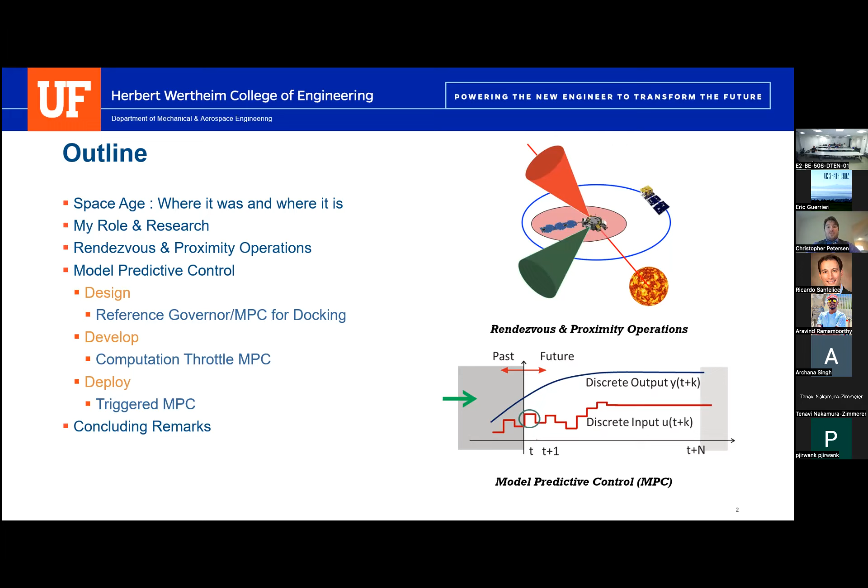So to set the stage a little bit, the first space age was in the mid 20th century. This first space age was really driven by governmental interests, primarily the US and the USSR. In 1969, we roughly had around 1,500 objects in space, 7 nations operating out in that regime, 2 nations to the moon, but a lot of the focus was either close in on Earth or just landing someone on the moon, nothing in between, and maybe sending a satellite very far out beyond our solar system. The aspects of controlling a vehicle in space were very narrow at the time.

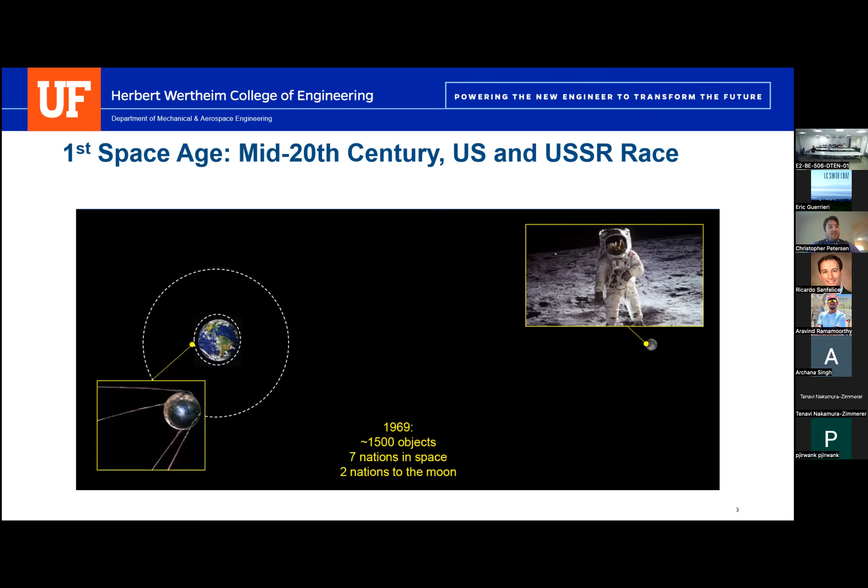But now let's flash forward to what I call the second space age, which we're living in now. This is partially driven by governmental interests, which still persist, but it's also driven by a lot of industry. If you look at Amazon and SpaceX, they're sending up thousands of satellites to facilitate wireless internet or some of their own interests. OneWeb, which was also going to send up 1,000 satellites before they went bankrupt, had a lot of interest in trying to create their mesh network. And that was primarily around LEO, which stands for low Earth orbit.

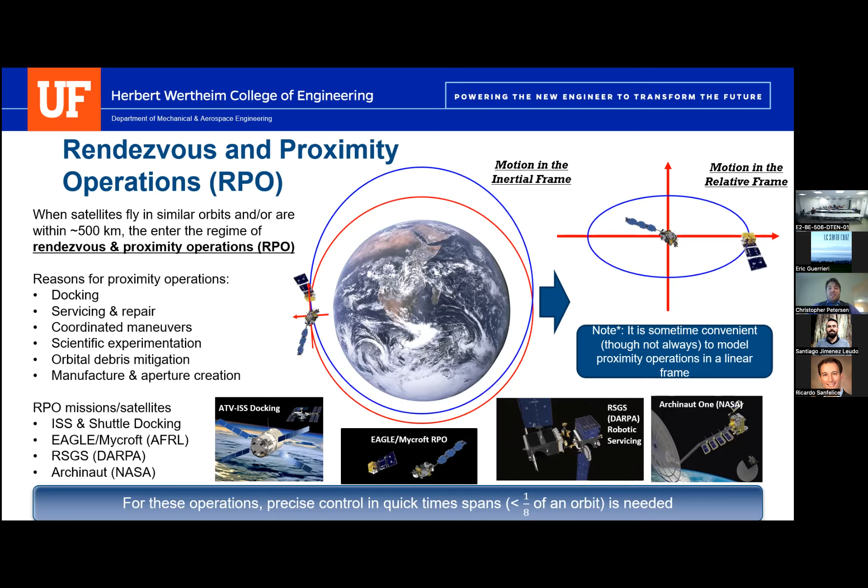But all of these missions require precise, quick control, typically on the span of 1/8 of an orbit, which for objects near the ISS pretty much corresponds to control mechanisms on the order of minutes. In geostationary orbit, we have a little bit more flexibility, controlling maybe once every 5 minutes if you're not that close, but you need a lot of precise maneuvering, which is why techniques like model predictive control are rather convenient.

Now, you only execute one portion of that trajectory, and you see where that lands you. And because all models are wrong, some are less wrong than others, because of unknown disturbances or some other factors that you might not be accounting for, that trajectory is not going to closely follow what it desired. So at that second time instant, you re-optimize, you re-look over that horizon, and you come up with a different path. And you do this at multiple discrete time instances, nominally at some constant frequency, and what you get is an ever-evolving path.

Now, MPC has numerous benefits. The design process is rather systematic. It's rather straightforward. You can optimize a cost function that you've defined as a user, subject to state and control constraints which reflect safety. And because you are doing this re-optimizing process, it is responsive to changes in the environment. But what it is not is always computationally efficient. Optimizations in general cannot be performed on millisecond levels unless they're finely designed. And continually optimizing is not always stabilizing.

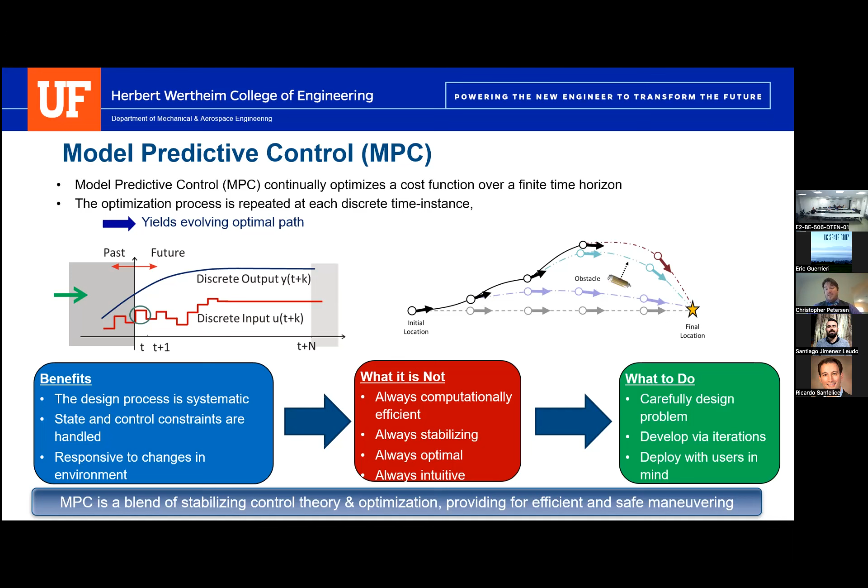So this talk today is roughly going to go over a little bit more of the intricacies to think about when you start looking at MPC and some of those considerations you might want to take a hold of when you're designing it for particular applications. And these considerations I've binned into 3 categories, which I call design, develop, and deploy, which can be thought of as theory, application, and implementation. And for the design phase, this is where you start thinking about theory. This is thinking about what model do I use? What metric do I use to minimize this? What are the constraints? A very common thing we think about in control: is this resulting feedback law stabilizing? And will the value function decrease? Those sorts of things which people don't often think about if they're just saying, let me recursively optimize this function.

Then you get into the develop phase. And once I've formulated a nice problem, what do I use to solve it? What are the speed and memory constraints that I am dealing with? What are the convergence properties of the thing that's actually solving the problem? And that's often a decoupled process. And one of the things that I very much like to do is look at the intersection of those two.

And then finally, the deploy phase or the implementation is, okay, now that I've designed it, what are the inputs to this algorithm? What are the outputs? How do I command this? How do I display the data? Which might seem trivial at first, but for a user who wants to basically deploy MPC and use it, those things are important. And there might be inputs and outputs, which we as control engineers might not typically think are important, but might actually increase the breadth of MPC far past what has been initially envisioned. And I'll get into that a little bit later.

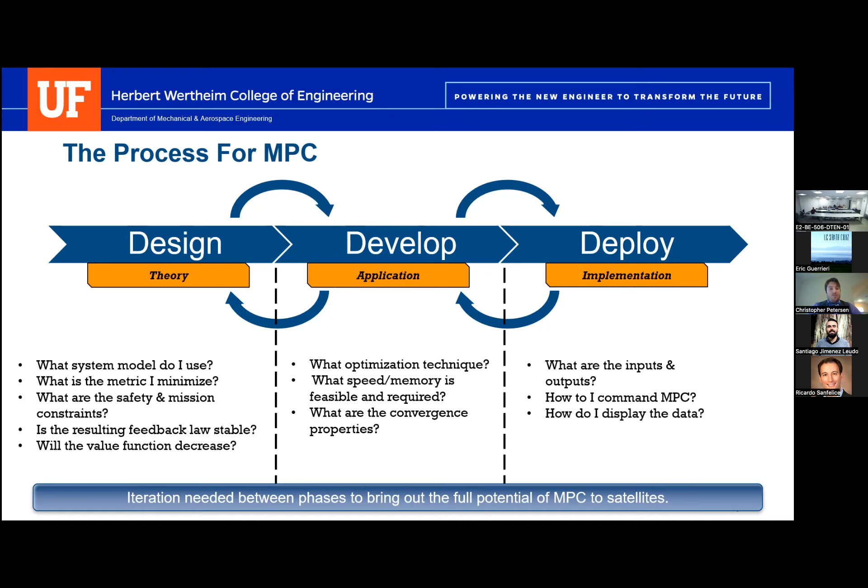But all that to say is that an iteration is needed between all of these phases. And if it's done this way, what I've seen, at least in terms of model predictive control, is it really starts pushing this technique past what anyone had imagined. So let me get into at least these three phases and show you what I mean.

So let me start with the design phase. So in the design phase, this is where we commonly think about how we formulate the problem mathematically. And so as control engineers, one of the things we think about is what is the right model? As George Box had said, all models are wrong, some are less wrong than others. So what do we choose?

Now, there's two models that people like to commonly choose for rendezvous and proximity operations. The first is a nonlinear model, which is called the two-body equations of motion. And in this case, there are some relatively mild assumptions in this model. Gravity is the only acting force. The mass of the Earth is much greater than the mass of the satellite. The Earth and the satellite can effectively be treated as point masses, and that there's no mass loss. Those are some relatively simplistic, but some nice assumptions that generally hold.

And if we look at this, it lends itself to a very nice nonlinear model, which is shown by those differential equations. But this model does not have any closed form solutions if you start putting in control actions in it. So what that means in the entire scheme is we could use those dynamics, but we have to make sure that we use numeric propagation to basically show those trajectories as they evolve over the finite horizon of MPC. So it's great for missions requiring large maneuvers or more precise maneuvers, but it requires time to propagate.

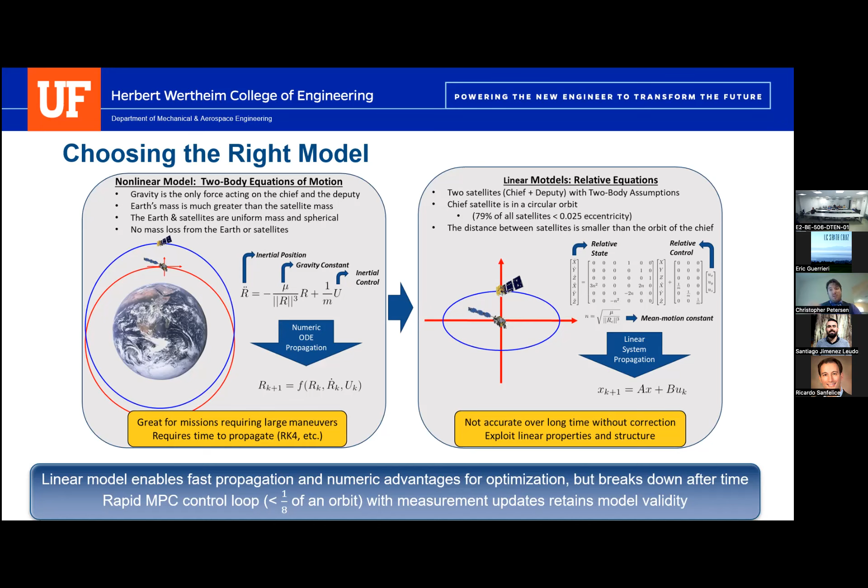So for MPC and optimizing, that's what we typically go with. But that's not to say that we can't use a nonlinear model for other applications. And in fact, for some MPC, that becomes more advantageous, especially if you're looking at satellites over longer time durations. But in my experience, the linear model has always been useful. But always when you say optimization, you have to think, what am I optimizing over? And while that might be intuitive to some, others it might not be.

So very commonly, people like to think, I want to get my satellite to the position as quick as possible. Well, that can be formulated as minimum time. So typically that's formulated as a mixed integer programming problem. Mathematically stated there, it's great for time critical missions, but the value function, which is basically a function that as you move your state around, what is the optimal of that? That value function is a stepwise function. It's very choppy, which is very, very hard for a lot of numeric solvers to actually find a solution to if you don't use the right one.

And furthermore, you get something like a control profile of a bang-bang solution, which some people like and others hate. It's great for time critical missions. It's terrible for fuel, and it's very hard to solve in real time. Okay, so now let me just look at minimum fuel. Well, I can write it as a quadratic cost, get there as efficiently as possible. It can be solved by a quadratic programming problem. And the value function is decently nice.

You can see it there on the bottom left-hand side in the middle box, but it doesn't necessarily have a unique minima. It has a well, which can be a little bit difficult for some solvers to get a solution to and can actually lead to discontinuous control. So it might be great for fuel critical missions, but because of this discontinuity in the control action, it might be terrible for stability and robustness, which is why a lot of MPC policies tend to go with the LQR cost, which gets you your nice quadratic cost, it gets you your unique minima, it gets you a nice smooth control profile, great for stability, efficiency, and robustness, but does not match the ideal mission.

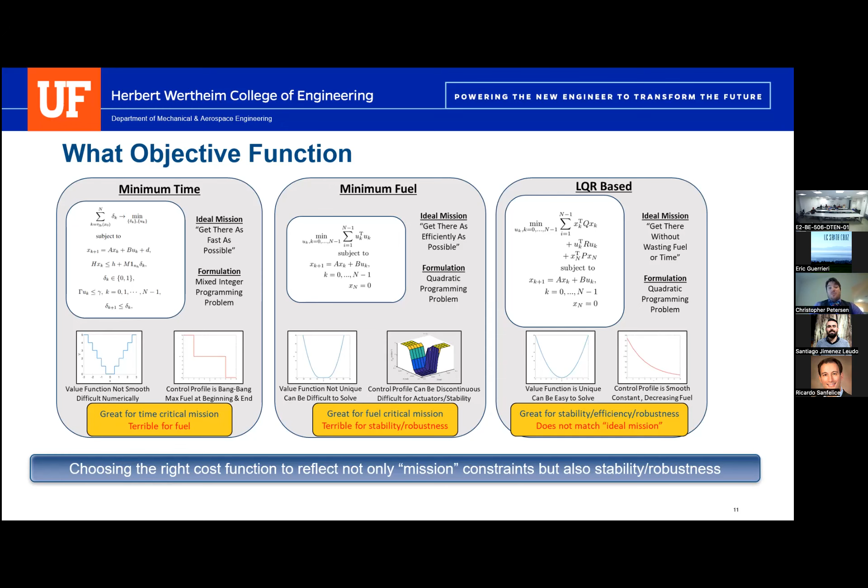And not only that, but also important to understand where it leads to stability and robustness. So oftentimes we've seen LQR works perfectly well, but we've also done minimum fuel and minimum time MPC, if only for the fact that our operators really wanted those two. And it might ruin stability and robustness, but there's some other things that we can recover in that.

And then my final aspect in this design phase is, how do I choose the right constraints for the mission? And typically in satellites, we think about safety as being paramount over anything else. So we have keep out zones. Do not crash and damage the satellite. Well, that can be reflected by a quadratic constraint. You have max control, which can be reflected by a norm. You can also have a unique constraint, which is an exclusion cone.

It's called lighting. And so if you assume that one satellite is always looking at the other, you don't necessarily want to consistently look at that satellite and then have the sun in the background, if only because of the fact you might damage the sensor. That can be reflected as a cone constraint, exclusion. Or if I'm getting closer to my satellite, don't go too fast. That's called a range rate constraint, and it's a fairly nonlinear one.

All that to say is, as you choose your constraints, you then choose the complexity of the problem. And you should not fear complexity, especially with MPC. You can make a nice quadratic program and solve it really efficiently, but if it doesn't solve your goal, then don't use it. Don't restrict yourself to fancy linearities. And that's what we found, at least for spacecraft applications. You have to dip your toe into nonlinear.

And then you can also have some nifty terminal constraints. You can say arrive at this particular orbit at this velocity. That's a nice, well-known terminal constraint. You can also say approach in this cone, and that leads itself to a nice set of other nonlinear constraints. But understanding how these are actually formulated and how to mathematically describe them is key to ensuring operational success.

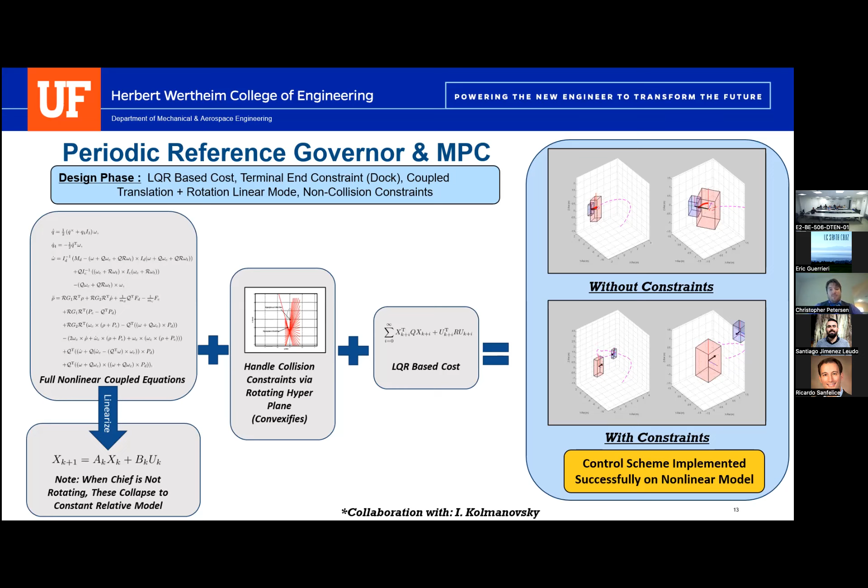So that's how we look at design. Let's take a look at the develop phase. And this is really once I've mathematically formulated my cost, my constraints, my model, how do I solve that problem in MPC? Because that's what I'm doing. I have to solve an optimization.

And my big takeaway for everyone here is really you need a solver that is correct for the mission and works with, not against, the problem formulation. A lot of people in the model predictive control regime just say, let me mathematically formulate my problem and let me have a black box solver just solve it.

That's great for prototype, but is absolutely terrible for real-time applications because that problem might not be able to be solved by that black box. So that's not to say that you can't use a black box. It just goes to say you have to understand what goes underneath the hood.

And so two types of solvers or optimization techniques that I look at for these types of things can be binned into nonlinear and quadratic linear solvers. Nonlinear solvers are basically those solvers that you can give a generic cost functional, generic constraints, and you can solve it. It's great for nonlinear aspects of costs and constraints. It's great for complex objectives.

And there's a great number of techniques like sequential quadratic programming methods or SQPs, particle swarm, simulated annealing. There's techniques like GPOPS out there that can solve this. That's great, but they're awful for rapid control. It could take anywhere on the order of several minutes to several days to solve a poorly posed optimization problem, which is not good for rendezvous and proximity operations.

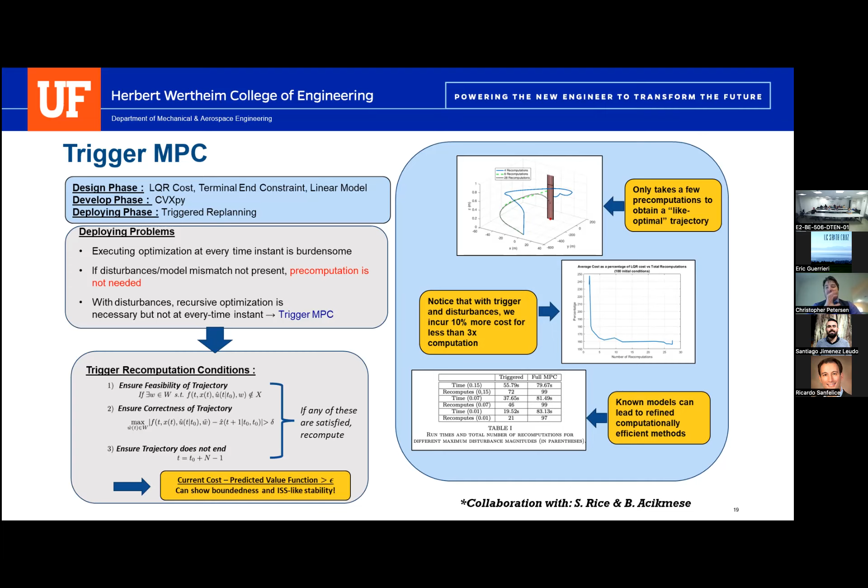And this lends itself to being able to be utilized for more complex MPC. If we can reduce computation, then we can use more complicated solvers, more complicated problem formulations. So this kind of starts showing that MPC has a great theory associated with it, has a great theory with the solvers, but if you start understanding how it's implemented, then we can actually start playing with that and really pushing the bounds of MPC.

So let me get to a couple of conclusions here. And really all this to say, I went through a lot of material at a very high level, and I love MPC theory. I love how I choose solvers, and I love how it gets deployed. And there's benefits in trying to understand each of those aspects.

In the design phase, all I have to say is being aware of what that problem is and how it best fits the mission. In the development phase, how are you conscious of what solvers you use, and how can you exploit that for either computational gain or efficiency? And then the deployment phase, how do you understand how it's being deployed to maximize the potential of a satellite?

Now, when Ricardo asked me to talk, this all has to deal with cyber physical systems. And this really gets into that aspect. How do we take the mathematics that we derive on a daily basis? How do we make sure we understand what's being done from the aspect of the optimization? And then how does that get deployed on a physical system? And if you continue this iteration through design, develop, and deploy, you start getting an algorithm that really starts to, like I said, push leaps and bounds beyond what anyone had thought of.

And to end on this, we did something similar like this process on some of our current satellites. We implemented MPC and we got efficiency that we thought, but then we started pushing that bound, and we used MPC for aspects such as fault recovery or aspects of actual automated decision-making, things that we didn't think of, but we actually got to that point only because we considered these 3 steps.

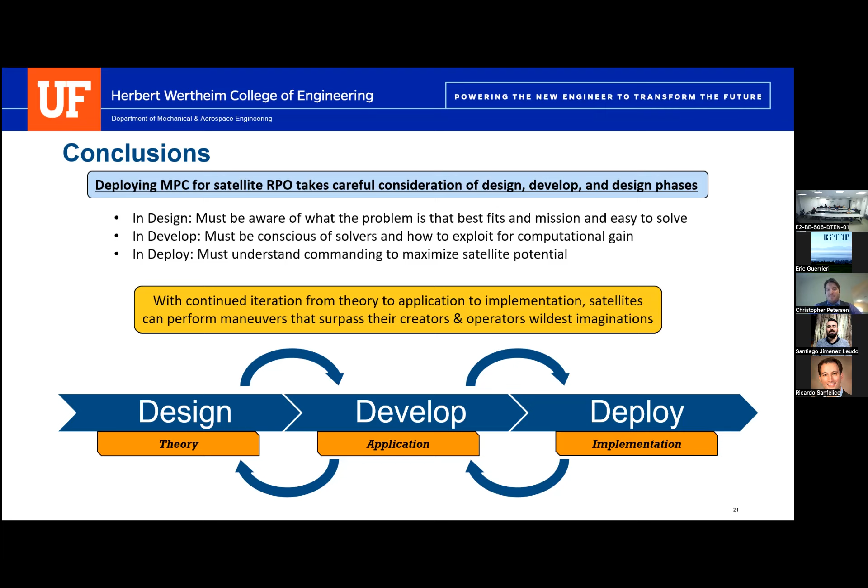So I might have overwhelmed a lot of people because that was a lot of material, and I realized I just went through that really quickly. But at this point, I'm happy to entertain any questions, and thank you all for your time.

Great, thanks for the great talk, Chris. Questions from the room here in the physical room?

I have a question. On slide 15, you said the memory footprint increased from 1 to 5 megabytes to 10 to 100 megabytes. Was that just because you re-implemented it? You were using a different implementation of the solver that was less efficient for this space and memory usage? Or what was the cause of that pretty significant increase?

Yeah, so you can look at it from the lower and upper bounds here. So the 1 to 5 megabytes was using a lot of MATLAB's intricacies of memory usage and how it can reference things. But to deploy a solver from MATLAB into an actual embedded system, you need C++ coding or C coding. So oftentimes you can basically do what's called auto coding that system. And if written poorly, MATLAB's memory usage, when it does auto coding, it doesn't do what's called pass by reference that well.

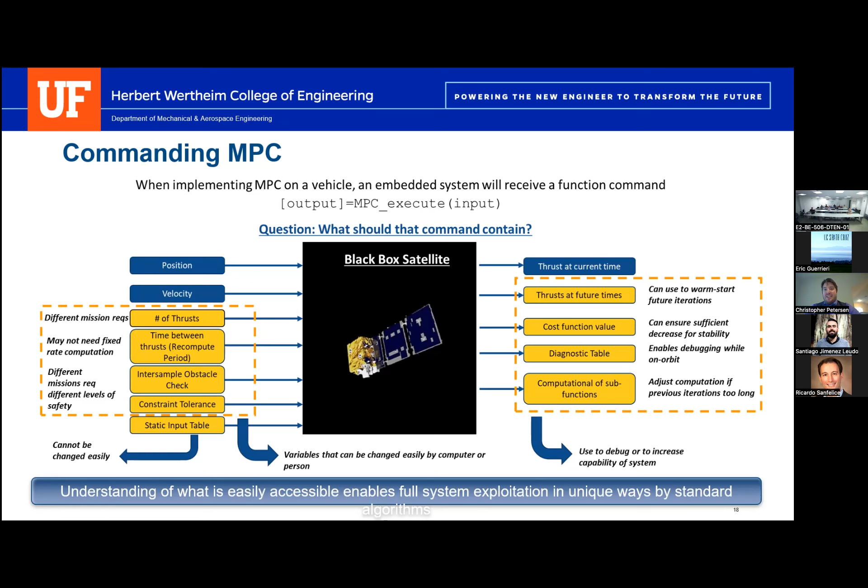So in that case, that goes back to maybe this chart here, I couldn't really use a quadratic problem solver because the memory, even to the best of my ability, I can only get it down to a megabyte because of matrices. So by using something like a linear accelerated gradient, I was able to get that memory usage down to about 20 kilobytes. But yes, I've done a lot of coding in terms of MATLAB, and I've done a lot of hand coding of C++ in order to try to make that memory limit.

Sometimes it works, in which case great. And other times, if it doesn't work, then it doesn't work in the deploy phase, and I have to either consider, all right, do I choose a different solver or do I choose a different problem formulation that maybe gets me less variables at the end of the day?

Other questions for Chris? Maybe from the Zoom room? Anybody there?

I have a question. You said that the systems on the satellites could only last for max 2 years, I believe you said, because of the radiation. What happens after those 2 years? Do they just shut down the satellite, or replace it, or what happens then? Yeah, so maybe let me clarify on that. RAD750 boards are meant to last 2+ years, and typically they last for 10 years.

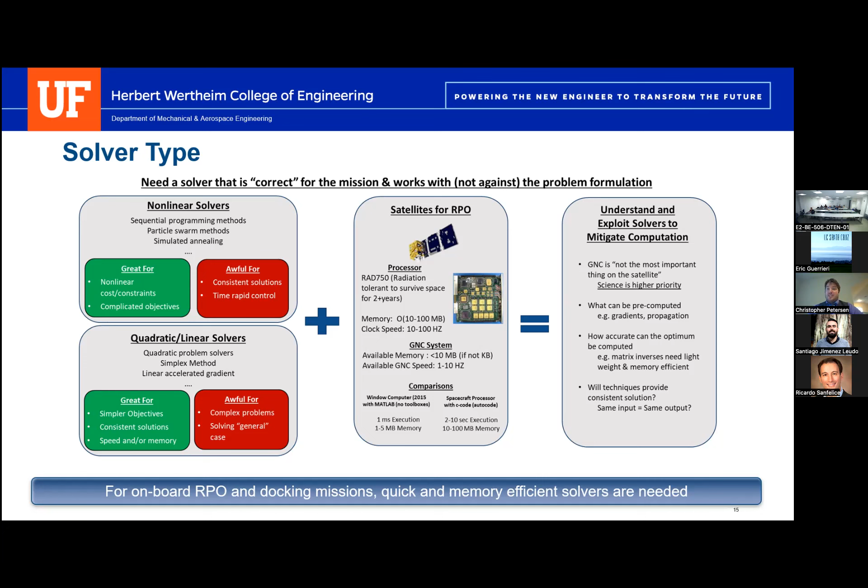If you just have constraints that you know are static and will be pretty constant throughout your entire time horizon, like maximum fuel constraints, for instance. Let me go back to this. Like that max control constraint is a pretty static constraint. And even range rate constraints or lighting safety can be posed in such a way that you don't need to have any knowledge and they don't need to be time varying. So as long as your constraints aren't time varying and you have the memory budget, I think explicit MPC is a wonderful way to go.

The downside, and probably this gets to your first question if I heard it correctly, is what do you do when you start looking at the collision constraints? And those can be abstractly mentioned as time varying constraints. And if those collision constraints don't vary with time tremendously, you could do an explicit MPC methodology.

But one of the powers to having MPC online is if you have constraints that vary with time, or you have constraints that you might have to turn on and off, or you have constraints that you know the basic form, but you might not know where the center of that exclusion zone is starting. That is where I see explicit MPC slightly failing, unless you have the ability to communicate to the ground rapidly enough and then re-upload your explicit MPC policy.

And then to get to your first question a little bit more, a lot of my avoidance constraints, I kind of flip between two different ways. The first way is I do convexify them. I use rotating hyperplanes on a lot of my non-convex constraints in order to get a conservative but feasible solution. And if you rotate those hyperplanes in ways that you ensure feasibility, that's a good way of encapsulating those collision constraints. The other way that I do it is I just take the collision constraint as is and I stick it into a nonlinear solver.

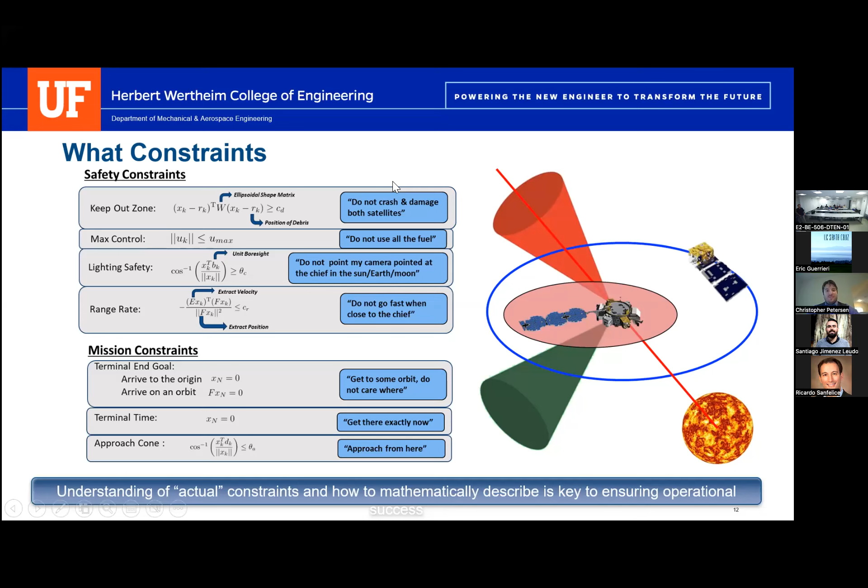If you have a few minutes, why don't you take a 5-minute break and then we'll connect back on this link. I'll be at my office for a little bit and we can chat a little bit. And then I think Paul can join as well. Sure. I'll just leave my computer on and I'll stay on this link. Okay, we'll be back in 5 minutes or so. Copy that. Guys, feel free to take